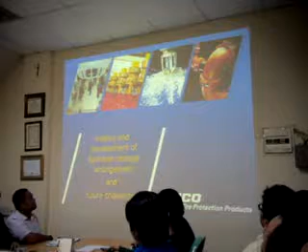As I understand, there was some interest in storage arrangements, especially related to rubber and tire storage. But I will start first with an overview of storage arrangement with the sprinkler, how the sprinkler has developed for storages. And then I will come later to the fire, and we can discuss it in detail.

In general, I have a presentation more for either designers or distributors. But this is for consultants and distributors, with more detail. So it's not so graphic, this is more detailed, just an overview. Later you will discuss more about the design. And we can talk about the NFPA and FM for storage fires. That's good.

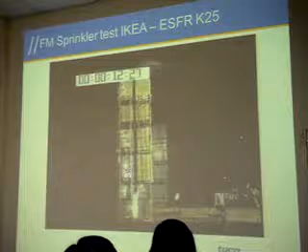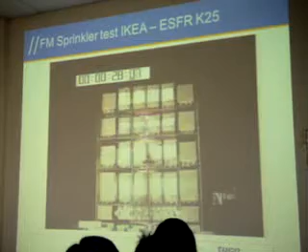I will start with the fire test. This is a test for ESFR sprinkler, an IKEA test. You can see the fire in the bottom of the racking. This test for IKEA was made at FM around 2000, by FM Global. You can see how fast the fire is growing inside the rack, there's a lot of air and combustibles. About 30 seconds to reach 10 meters to the roof, approximately 35 seconds.

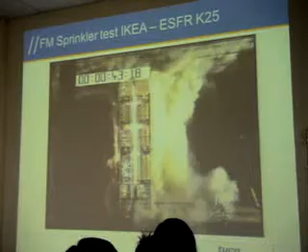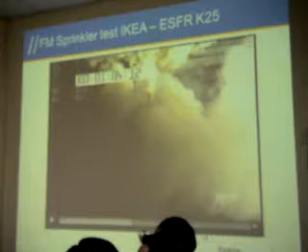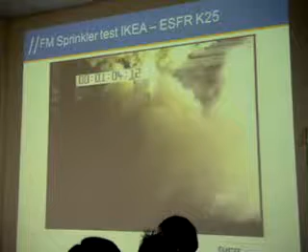So, how did we get to where we are today? I will talk a little bit about the history of how sprinklers developed. This is a normal sprinkler, what we were using very early. The modern sprinkler was developed in '53, the standard spray sprinkler. Before that it was the old conventional style, where water also came up to the roof, so it was more like a ball, 40% going up, 60% going down. Then they developed the spray sprinkler, so it's more like 95% going down on the floor, wetting the area where the fire is.

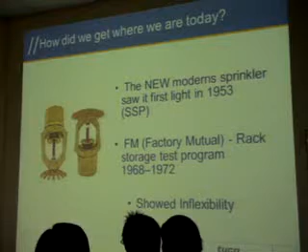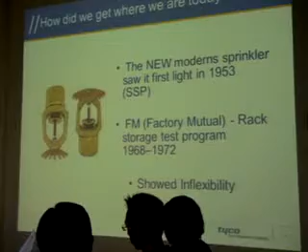Going back to storage arrangement, FM did testing in racking between '68 and '72, where they could see that before that, the end user could see normal roof sprinklers were not enough for controlling fires inside storage. But at that time they had only about 4.5 meters of storage maximum, at best. So the function of the sprinkler is only to control the fire, right? Yes, and the spray sprinkler is a control mode sprinkler. I will come back to that later.

So what they did during this test between 68 and 72 was showing that to have only a sprinkler in the roof was not sufficient. With the K80 sprinkler, it's not so much water that can come out of it. So what they showed was inflexibility, it could not control the fire. So they started thinking we need to do something else.

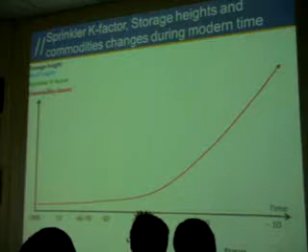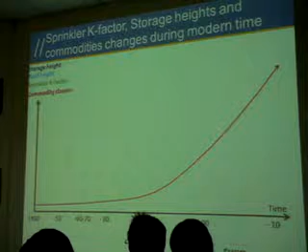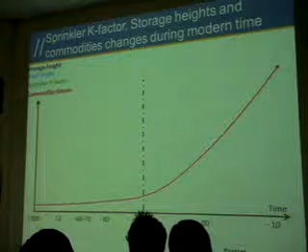So now I will talk in a graph, not so much about text. So I will show you here how K-factor, storage heights, and commodities inside the storage area have changed over time, from 1950. So we start with the storage height, this has changed, row height has changed, K-factor and commodity classes changed. You can see that if you set this red line, it's not really a science, but it's just to show you what has happened. You can see that the commodity classes really changed during the 1950s. In that time it was not so much plastic as we have today.

So on the left side we have the control mode design area sprinklers, CMDA. Then you have control mode application sprinklers for specific areas. And then here at 53 we have the modern sprinkler. Then you have storage heights of 4.5 meters, and roof height around 6 meters, and then you have a K factor of 8.

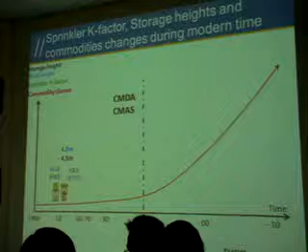What happened after this FM test is that you need to have more water on the fires, so they invented the K160 sprinkler. And that solved the problem for a small while.

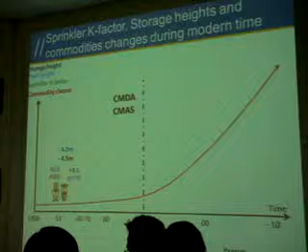And then in the 60s and the 70s, the roof height started to get up on the storage because the land prices started to rise, so they needed to go higher.

Is this you mean this is the year? Yeah, and the timeline is year.

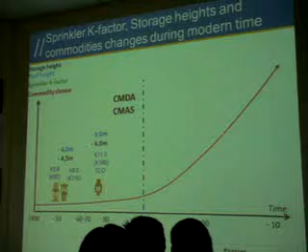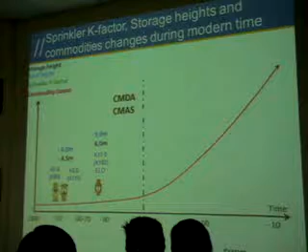The biggest K factor, the more water. Yeah, that's a simple equation.

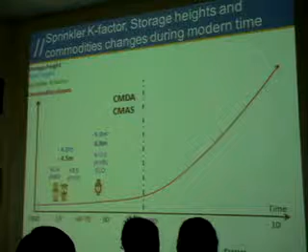So anyway, in the 60s and 70s they did more testing, and then in the 70s-80s they invented the ELO sprinkler. It's called extra large orifice. So they got up from K factor 115 to K 160, and the roof height now is 9 meters at that time, and the storage height is maximum 6 meters.

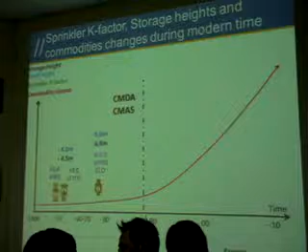So the roof is meaning the ceiling. Ceiling of the storage. Storage height is not about the goods.

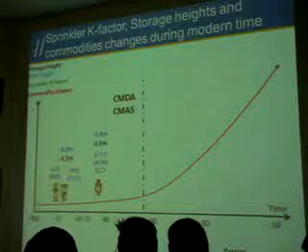I try to do it more logically. If you see on the left side, you have storage height in black, roof height in blue, K factor and the commodity classes. I was not consistent there, I would say, I need to change that. I will put that as a reminder to myself.

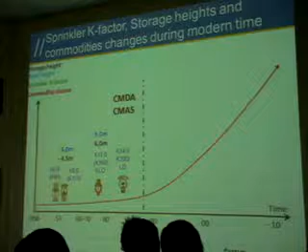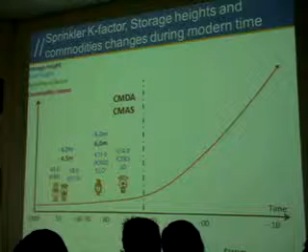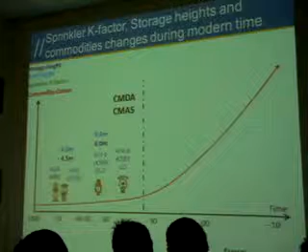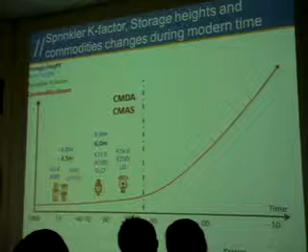So on the right side here, on the dashed line, you can see that they were experimenting with a different approach of sprinkler. So then they came up with the concept of ESFR, which stands for Early Suppression Fast Response.

So on the left side we have control mode sprinkler. I will show you later about the difference.

What they invented was a sprinkler called ESFR sprinkler, and they started with a K factor of 200. They call it K14, or ESFR1. It depends. So now the roof height is almost the same, but the storage height is higher.

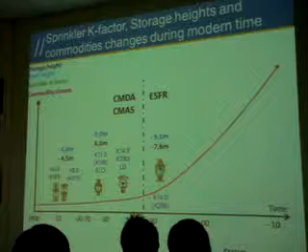This was when they started to investigate and develop this sprinkler in the mid-80s. So it took them a long time to make it. During the years the K factor has just grown and grown, and here is where we are today. We have storage heights up to 12.2 and roof heights up to 13.7. And that is without in-rack sprinkler.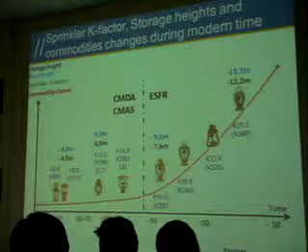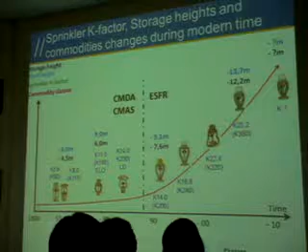So where are we heading? I think we are heading for higher roof heights, higher storage heights, and bigger K factors. Because land is not cheap, so they build on height. That is the future.

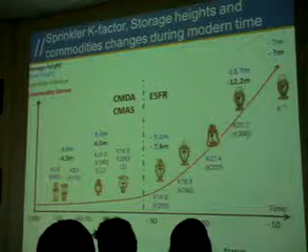Next one. Now I will talk a little bit about the difference between the control mode area density sprinkler and the ESFR sprinkler. Just to show you, this curve is not science, it's just a common picture.

Here the fire starts, you have the heat release over time, so normally the fire is exponential. What happens when you have a control mode area density sprinkler is that you cut off the heat release and you control the fire before you have a critical situation in the area where you are. So it will control the fire.

That is the thing. But normally if you have a fire in this area and you have a sprinkler, the fire load is small, and only one sprinkler releases, so you will extinguish it anyway. But it's designed for a bigger area.

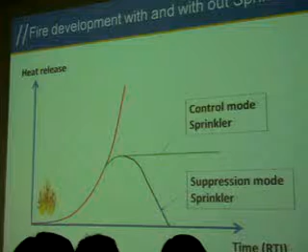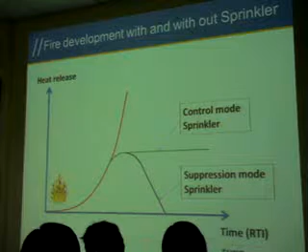So the difference when you have a suppression mode is that you suppress the fire and the heat release and extinguish the fire. That's the big difference between a control mode area density sprinkler or a control mode specific application.

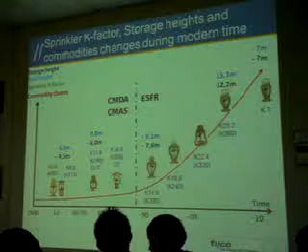What they are playing with is also, if you thought about the previous text, this one between the left side and the right side of the dashed line, ESFR. When they started developing the ESFR...

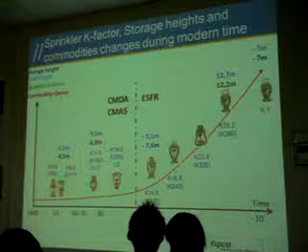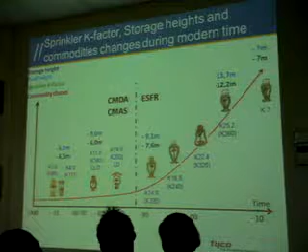They were playing with the response time index, how fast the sprinkler was, because what they're thinking is that you need to have early detection to suppress the fire when it's still small, and also to work with this ADD and RDD, as they call it.

Required delivery density and actual density delivered to the space. So they were playing with three different factors in the equation: RTI, and the RDD and ADD.

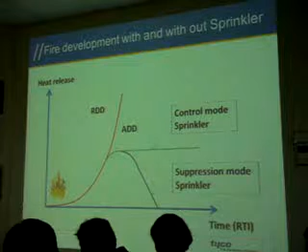So they were playing with this, and then they came up with a suppression sprinkler.

So now we go to chapter 2, and that's challenges for the property owners and users, and also insurance companies. This is what we're going for. You can see the storage is getting higher, larger. Storage, commodities, more plastic.

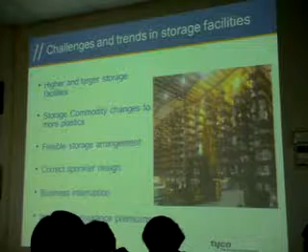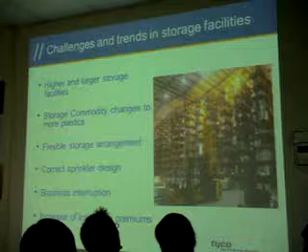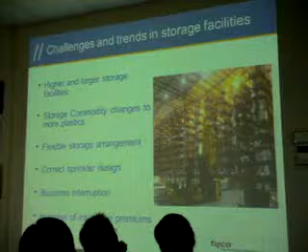The end user wants flexible storage solutions. They don't want indexed sprinklers, because then they get stuck - not flexible to change the rack anymore. And then, of course, to have the correct sprinkler design - but sometimes it's very hard to do that. And of course, if they have a fire, they will have business interruption. That can be very costly.

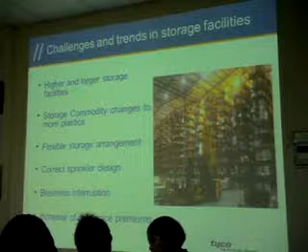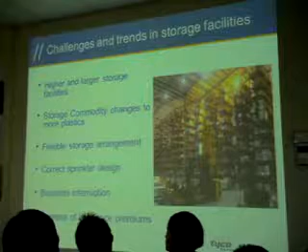I can give a small example from the end of the 90s, I think, when Ericsson and Nokia were the big key players in the phone industry. Ericsson had a production facility in Mexico for producing chips for the telephone, and they had a big fire there - no sprinklers. Very strange, but very stupid also. Before the fire, Ericsson was number one. After the fire, Nokia became number one in the world market.

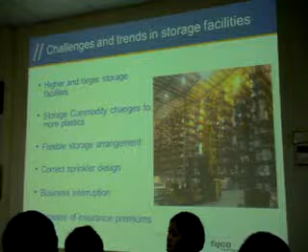So business interruption can mean that either you go out of the market, or you just lose tempo, or whatever. It's very interesting - it's very important to have the correct design.

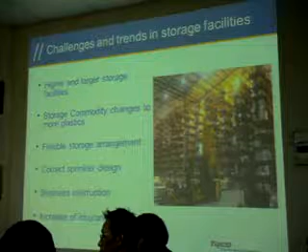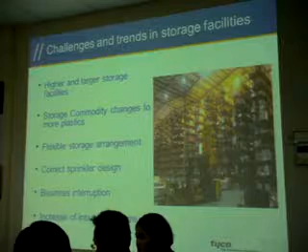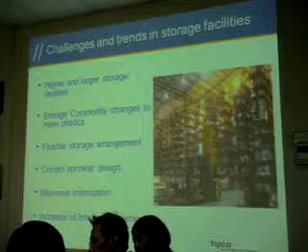So, of course, if you don't have the correct sprinkler design, you may have increasing insurance premiums, and that can be very costly for you - at least for international companies. I don't know how it works here in Asia for local property owners with their warehouses, but sometimes I don't think some of them are insured at all. That's where we in the sprinkler market need to change their attitude, to make them think that if they have a big fire, they will lose a lot of value in the goods.

I just highlight to them this issue.

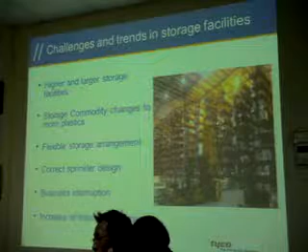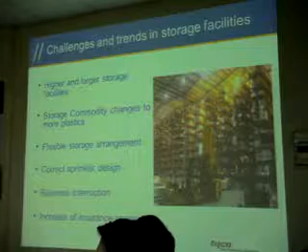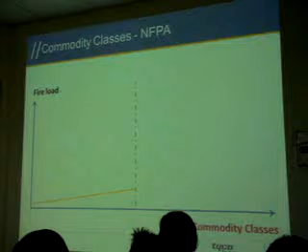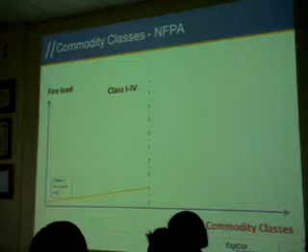I will talk about the commodity classes according to NFPA. On the left axis you have fire load, and on the horizontal axis you have commodity classes. I will start on the left side of the green dashed line, where we don't have so much fire load, and the classes defined according to NFPA. On the left side we have class 1 to 4. Class 1 is more or less no combustible material at all - you have some wooden pallets with metal scrap inside, maybe some carton on it, but nothing really that can burn.

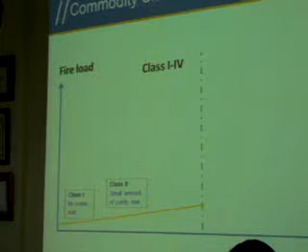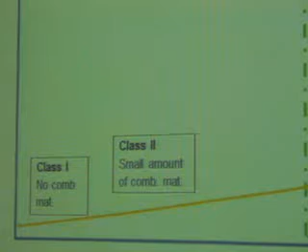Class 2 has a small amount of combustible material.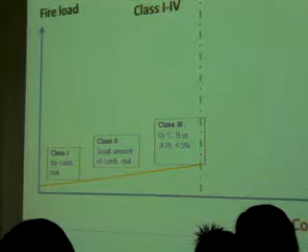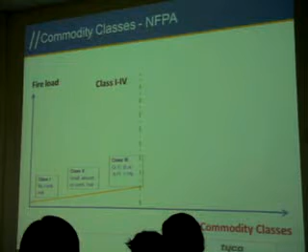When you come to class 3, you see it's a little bit on the right side of the green dashed line - that means we have some plastic on it. So now we start with group C, B, or A plastics - they have different plastic commodities. How do they define that? They can only be less than 5% of this, otherwise you will go to the other side.

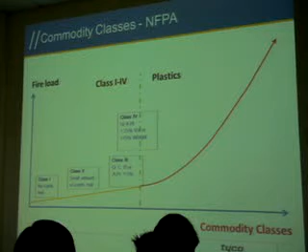Then you go to class 4. In class 4 you can have only group A plastics, and then you can have 25% of the volume maximum - you call it class 4 - or 15% maximum of the weight. Then you can see we are going more and more to the right side of the green dashed line. So this is what happens: we go over to the plastic side, and now we see the fire load really going up. Before it was moderate - now we start to go into the plastic.

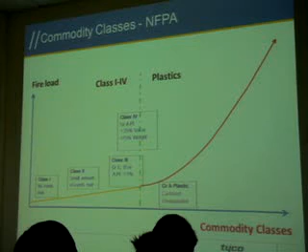And we have different groups of plastic - we have group A plastic, where you have cartoned, unexpanded.